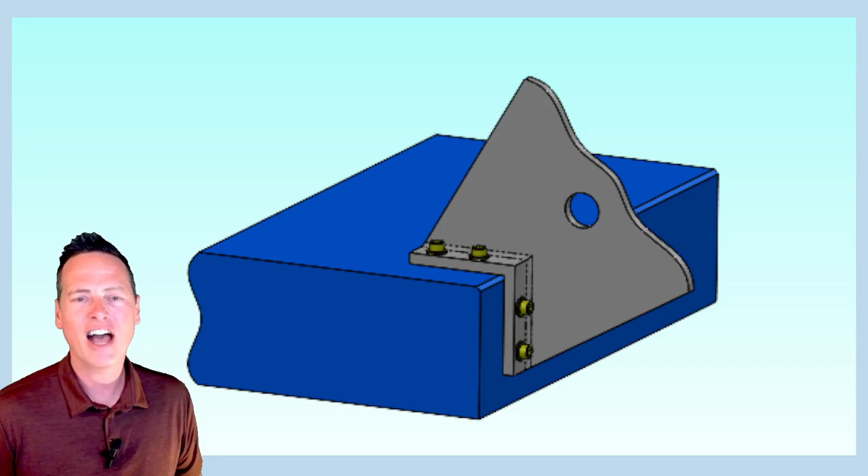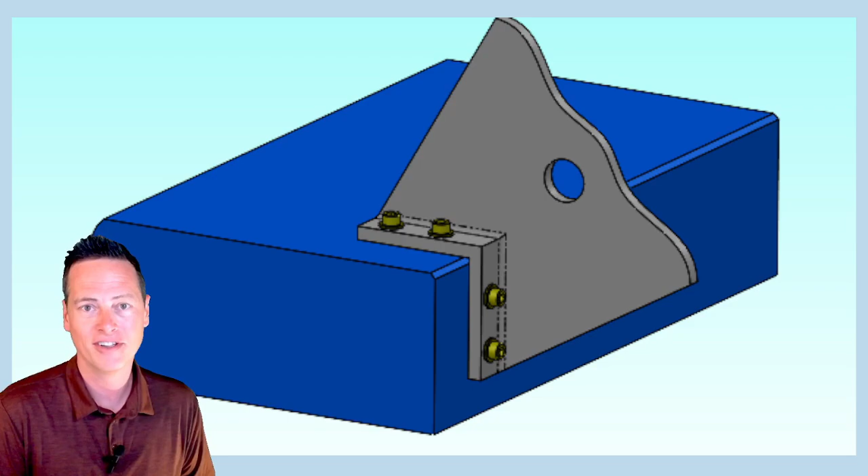The really controversial thing with this has to do with how these two sets of screws, 4 up here and 4 down here, will pull the gray part against the blue part in 2 different directions. I see people doing this when they expect to have forces in both of those directions and don't want to put the screws into shear load. Or maybe they have it in their head that they just want to create a really sturdy bolted joint. But this is likely to be a frustrating assembly for anybody who has to put it together.

Let's assume for a minute that these parts are both made really well. In particular, they're really super square in here. Which screws do I tighten first? The ones on the top or the ones on the side? Maybe I turn them all just until contact and then go back and torque them all later. Maybe I'm working in a pattern like I do with the lug nuts on my car wheels. Okay, it might work, or it might not be that great.

Let's remind ourselves of how these screws work. As we turn them into the threaded holes, they will close the gaps between the gray piece and the blue piece. When they tighten, the screws will stretch a very small amount and will essentially become very stiff springs. That spring force results in preload and will generate friction at the joint between the gray piece and the blue piece. With screws like these, it can be a subtle distinction, not very much turning of the wrench at all, that can make the difference between loose and so much friction that you can't really move these parts at all anymore. Maybe I'm not telling you anything you haven't already experienced yourselves.

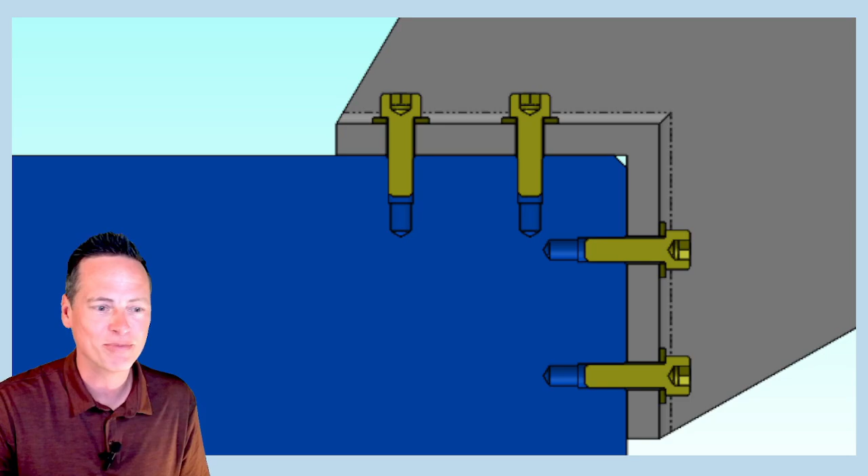What happens if I cross that line with the screws on top, but I leave a little gap on the side? Maybe it's very small. Now I have no real preload on the side. All I'm doing is preloading the friction on the top joint. Maybe one day these parts will take a mechanical shock and the joint will slip. Then my side screws will be loose. There's another possibility that I close the gap down here by stressing the gray part, deforming it.

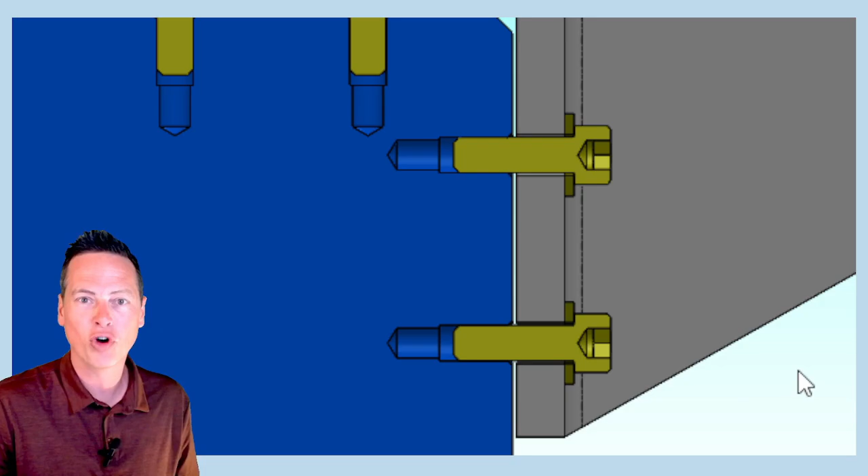Also not ideal. At the beginning of this example, I asked you to assume that these parts were made very square. But what if they're not? In this case, the gray part is a little more obtuse than the blue part. And you can see it has 2 positions it likes to be in.

Always creating a gap on one side or the other. And aside from that gap, whatever's at the other end of this gray piece is going to have a really hard time getting into the right position, isn't it? Unless maybe your idea is that we're going to use these screws to somehow tune this thing into just the exact right position where it's supposed to be. But if you did that, you would end up with very little contact, very little preload, and a weak bolted joint.

There are going to be some viewers out there, our special group of engineers, who will say, come on. They'll say, we'll get those special surfaces machined super square so the gaps won't be that big. We'll write an assembly procedure for the tightening of the screws, and whatever gaps exist, those will close up when we tighten this thing together. Maybe. I'm sure people get away with this every day, or they think they're getting away with it, but it's a bad design, and you shouldn't do it. It will create frustration on the assembly line.

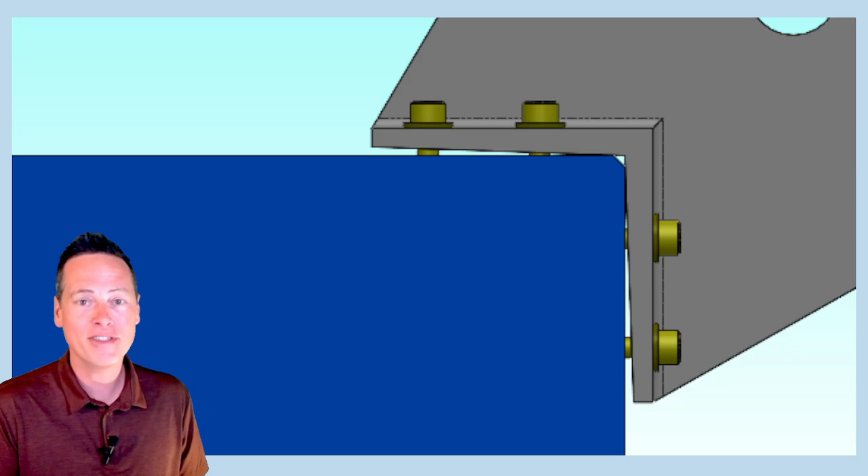I'm not sure these gaps will be that small, and if they are, it's only because we make tight perpendicularity callouts. And this gray part, it looks pretty stiff to me, especially in the direction of this giant rib. I'm not sure it's going to be very compliant at all. But anyway, let's have a look at this drawing. This is GDTG 00543. This is the way I bet 95% of designers would handle this drawing.

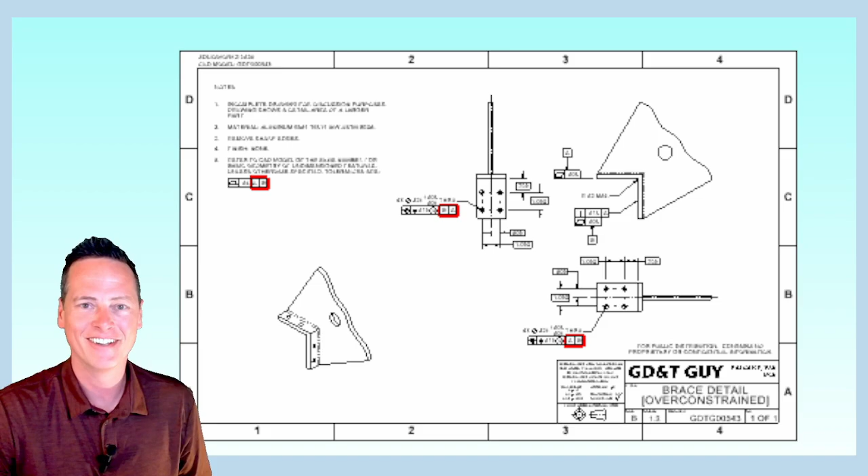Looking at the two surfaces, I kind of randomly chose this one here as being the datum A feature. They're both the same size and perform the exact same function, so it's not much of a choice, and it's a bad sign for us GD&T wise. I relate the side surface to datum A with a perpendicularity, and I call it my datum B feature. And let's make a note that whatever we put for our perpendicularity callout here, that's your gap. The only way to close that gap is to make this perpendicularity tighter, tighter, tighter.

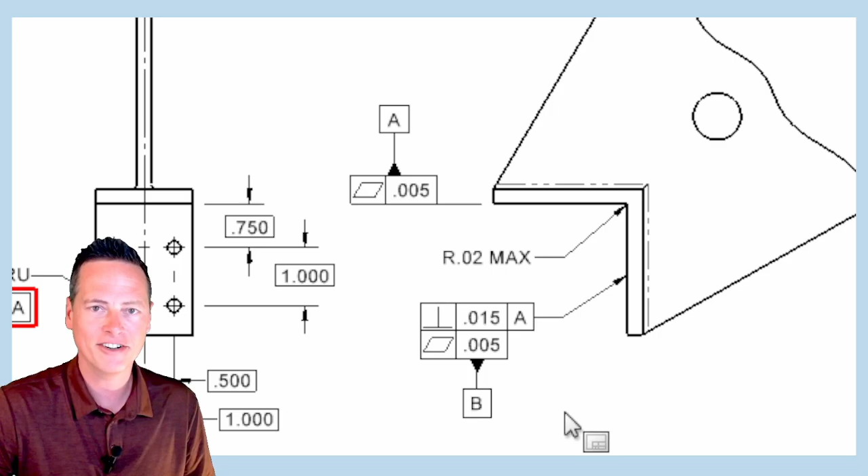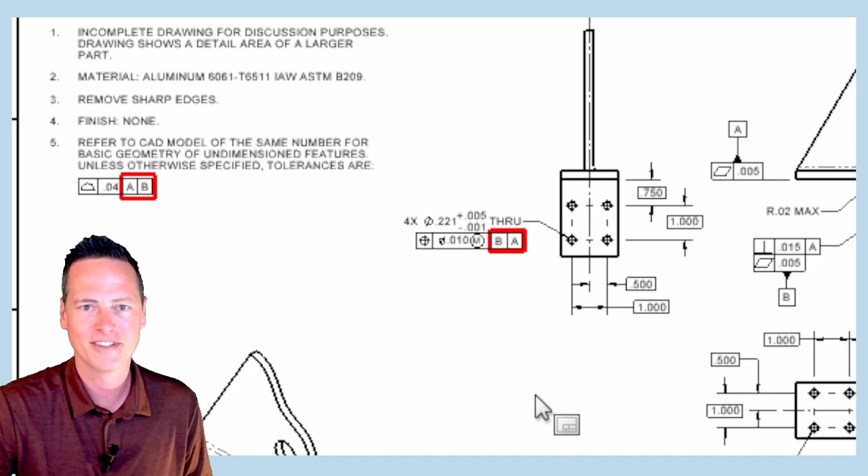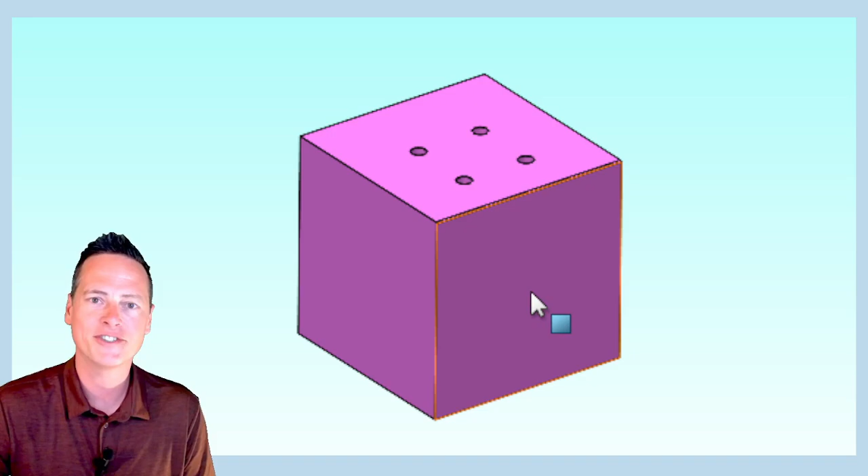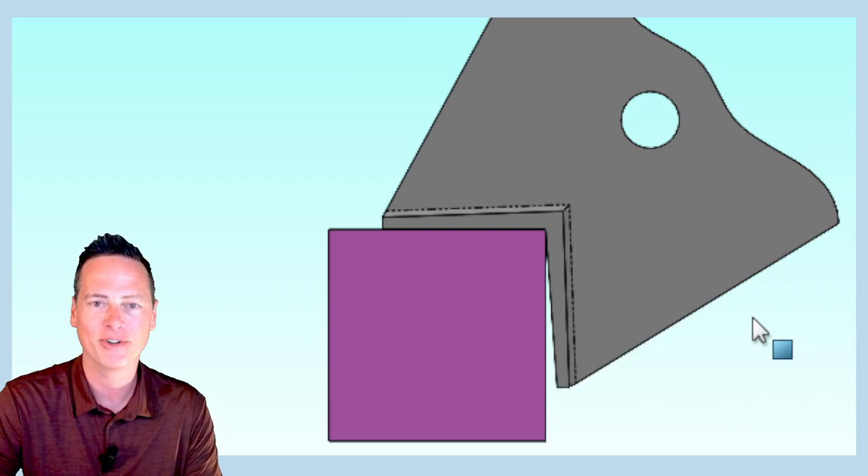On this gauge, this surface would be a primary datum simulator, and this surface would be a secondary datum simulator. And then it has these special holes up here on the primary datum simulator. So we place the part on the gauge to where it has full contact with the primary datum simulator, and then slide it over until there's contact with the secondary datum simulator. And then we check the hole locations with some special hole locator pins.

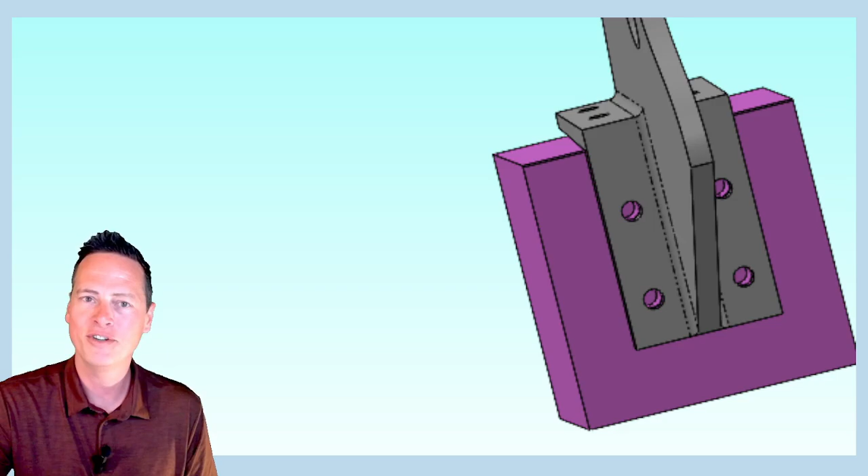Okay, and then we do the same thing on the other side where there's a separate inspection. Put the primary datum in contact, slide until contact on the secondary datum, and then we do the hole locator pins over here. You'll notice that at no time do we check the position of all 8 holes simultaneously. They're considered two completely separate interfaces.

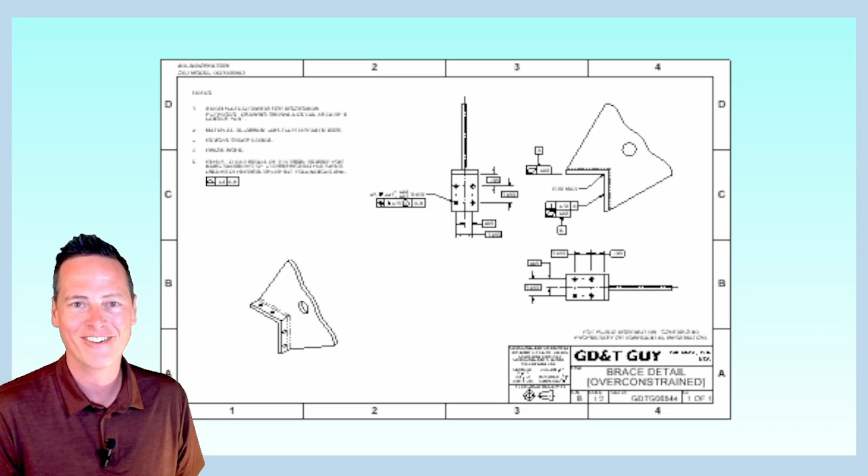But if you don't like that, then this drawing, GDTG 00544, might be a little more correct. This one is similar in how I established datums A and B, but then I use them as equal precedence primary datum AB, and I reference that for all 8 holes simultaneously. In the inspection, you would have a gauge that simulates both datums and can check all 8 holes at once.

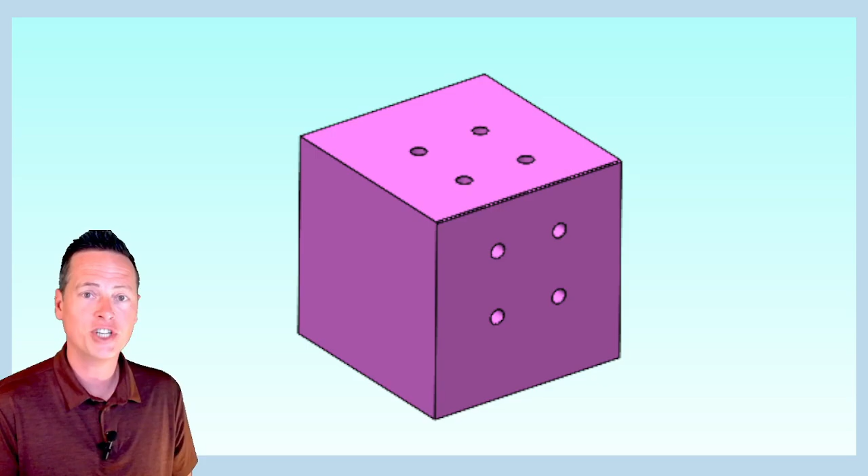And then if you ended up with gaps like this, the standard would instruct the inspector to slip in shims of equal thickness to neutralize the position. At least that's my interpretation. Usually when you have these equal precedence datum features, they are coplanar, coaxial, or at least parallel to each other. This one is like folded around a 90-degree corner.

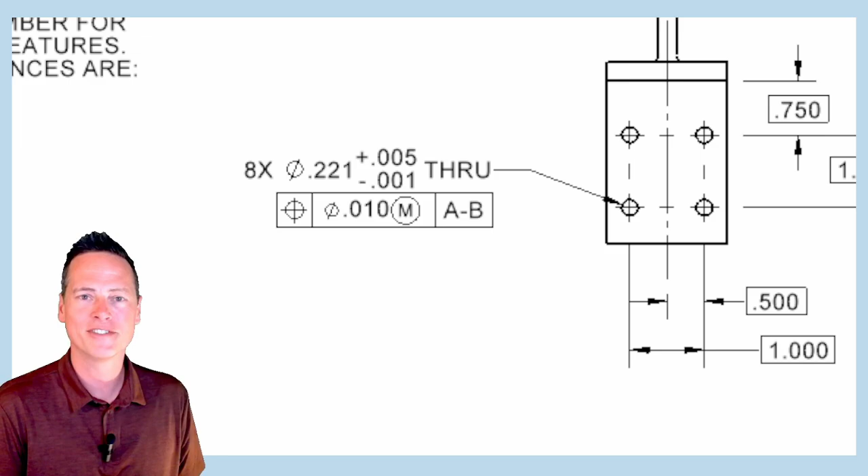We can hope that everyone is going to interpret this the same way, but will they? Anyway, I feel like with this drawing, we resolve one of the lesser problems. The bigger problem remains that our design is over-constrained and probably will not work very well in assembly. And I think that the drawings and the GD&T point to some signs that we're in trouble. And we're going to see some more of that as we move along here.

But what are we observing about over-constraint at this point so far? Well, what I'll probably tell you at least a few times in this video is that over-constraint creates conditions in which there is no acceptable tolerance, in this case, the perpendicularity, and so we end up with multiple unsatisfactory mounting positions. And to overcome these problems, we have to distort the parts, stress them, force them to come together.

And since we're always talking about constraint and degrees of freedom when we talk about datum features, it is in the constraint where we're really going to see the problems. And it's how we're going to fix the problems. Because once you get into the GD&T mindset, you're going to see these things right away and you're going to want to fix them. And then you're just a short step away from being everybody's favorite designer. Believe it.

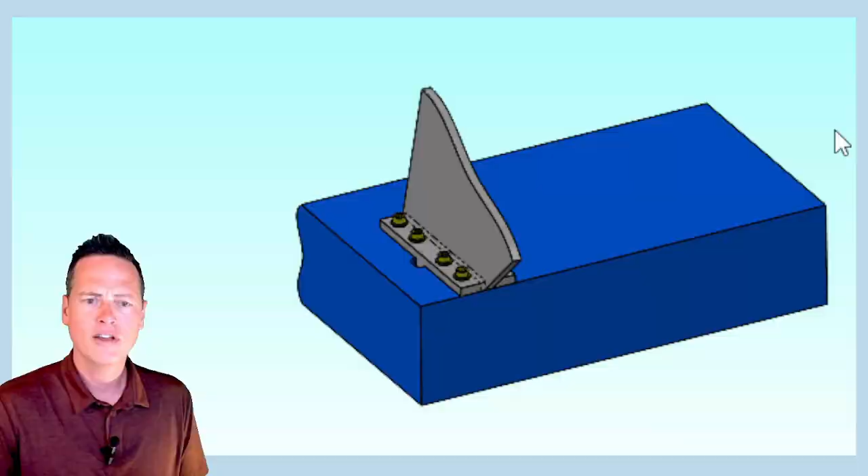So let's look at another version of this brace with a more traditional bolted joint. In this one, all the screws are entering in the same direction. And just as a side note, this might be a double good thing because depending on how big this blue part is, it might be pretty difficult or require some special equipment to drill and tap holes on the end of a really long part.

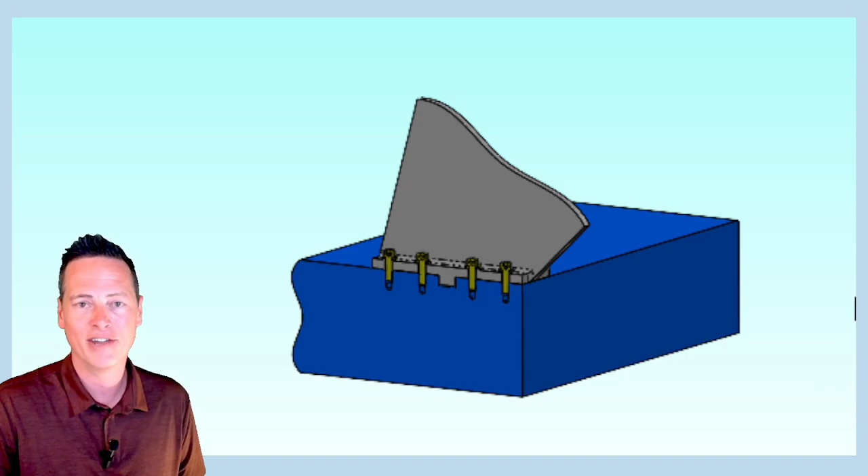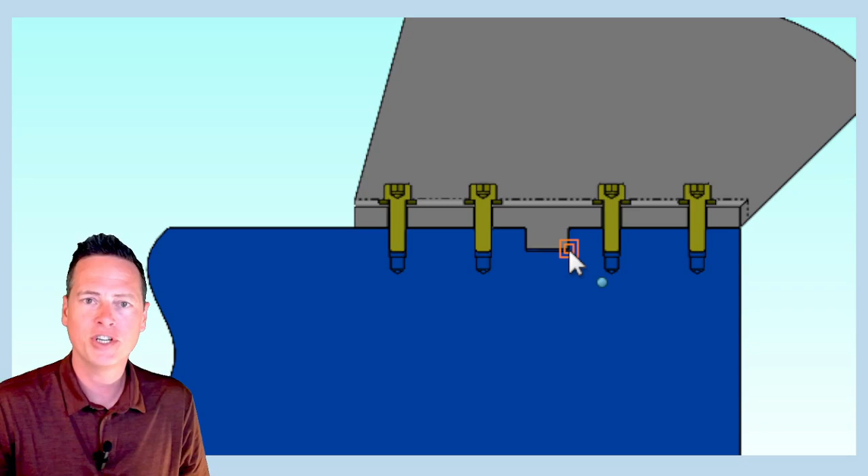Okay, but I digress. In the last design, we were concerned about having screws in shear. In this design, we're dealing with that problem by having a close-fitting locating feature to limit the amount of slip that can occur and to keep the shear load off of the bolts. The drawing, GDTG00542, is pretty straightforward, I think.

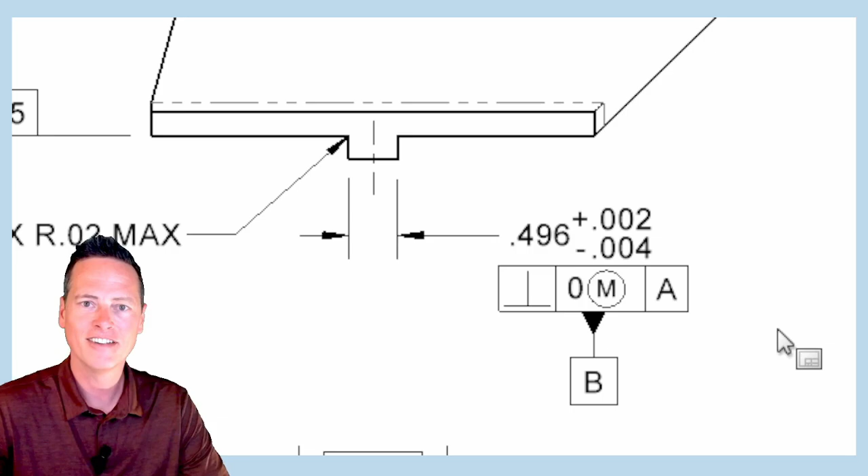We have a 2x coplanar datum A surface feature. And then our locating feature, this undersized half-inch key here, becomes our datum B feature. And then all of our holes and everything are located referencing datum A primary and datum B secondary. Now look, even with this, there's still the possibility or even the likelihood of there being gaps. And that all happens here in this 5/1000ths coplanarity. There could be 5/1000ths gaps.

But I feel like I can ask for 5/1000ths coplanarity here. I wouldn't want to ask for 5/1000ths perpendicularity on the other part. This is a simpler coplanar feature. It can be all made in one machining setup. And I have a couple other reasons for some confidence too. I think this is going to sit fairly evenly, etc. But anyway, I feel a lot better about closing a 5/1000ths of an inch gap than closing a 15/1000ths of an inch gap with screws fighting each other from two different directions.

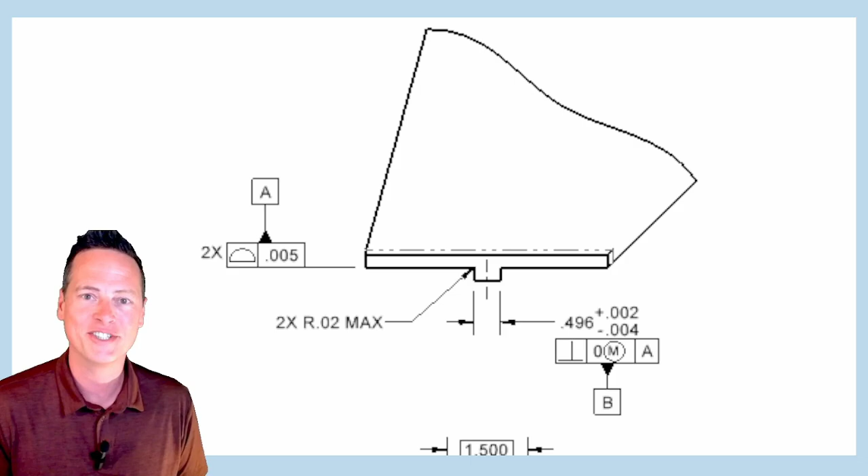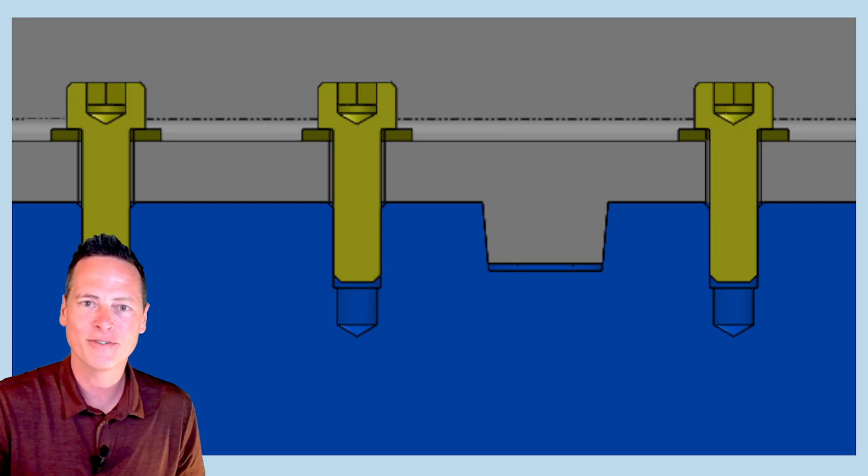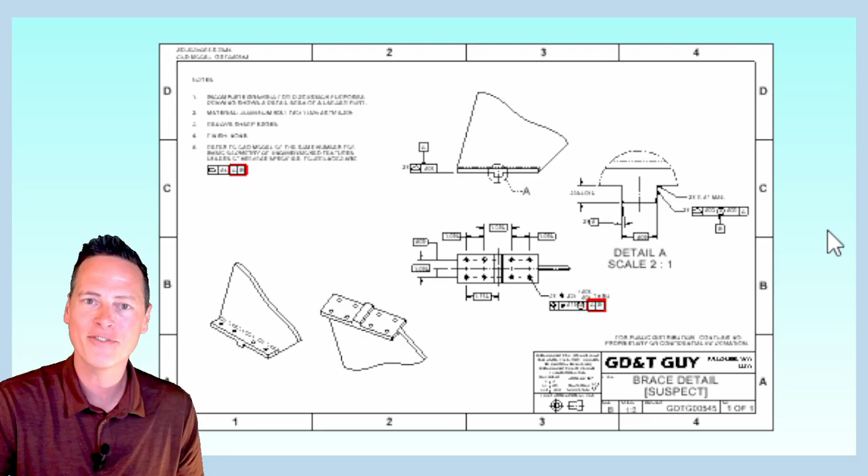Some of our special over-constraint loving viewers will look at the small amount of gap in these locating features and think, I don't like that. They'll say, you know what I want is a little taper in these parts to force like an interference between the gray and the blue. And then if I do that, there'll be no slipping or shifting at all between these parts. Okay then, so to look at a drawing for this, it would be GDTG00545. We've got the same 2x datum A surface feature.

And then in the detail, we can see our taper feature is dimensioned 500/1000ths at the root. The profile tolerance is unequally disposed. That's the circle U, with 2/1000ths being on this side, the outside of nominal, like we're trying for some kind of transitional interference fit. Now to me, this is a tight tolerance. It's analogous to plus or minus 3/1000ths. It's not just the profile or the form, it's like the straightness going in and out of the page across the entire width of the part.

But even being such a tight tolerance, it may be so tight that it can't be made reliably. Will it ever be tight enough to get what we want? We'll get to that in a minute. But first, here in the hole position tolerance, we're using datum A as primary and datum B as secondary at RMB.

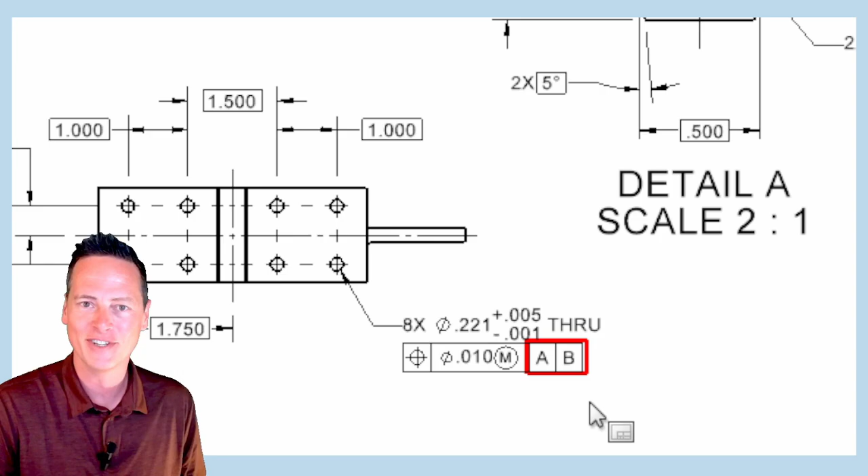Datum B is our taper feature, so by saying RMB, there's some more evidence that we're using this as an interference feature. So now look, datum A is a 3 degree of freedom primary datum, a planar geometric counterpart to these two surfaces, 3 degrees of freedom.

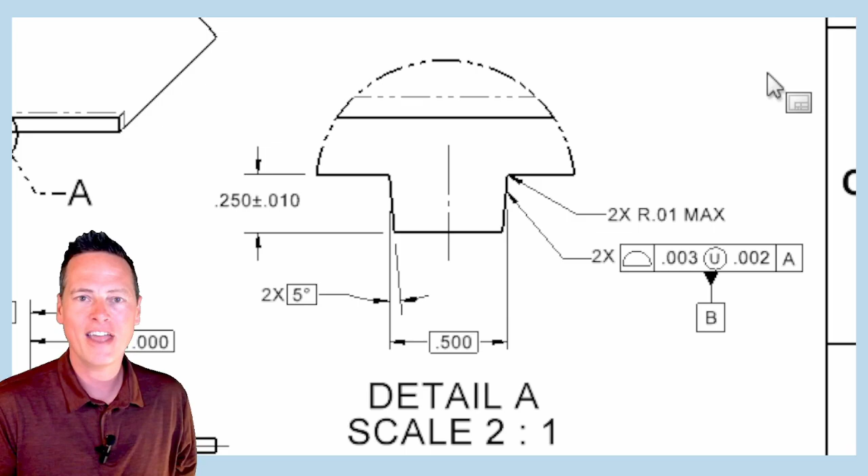Now, if you had this taper feature fitting into its idealized geometric counterpart, taper into taper, that would be a 5 DOF datum feature. If the taper feature is made small enough that there's clearance to the next part, then it could be a 2 DOF secondary datum feature at MMB, sure. But then it wouldn't be a whole lot different from the non-tapered clearance locating feature from GDTG 00542.

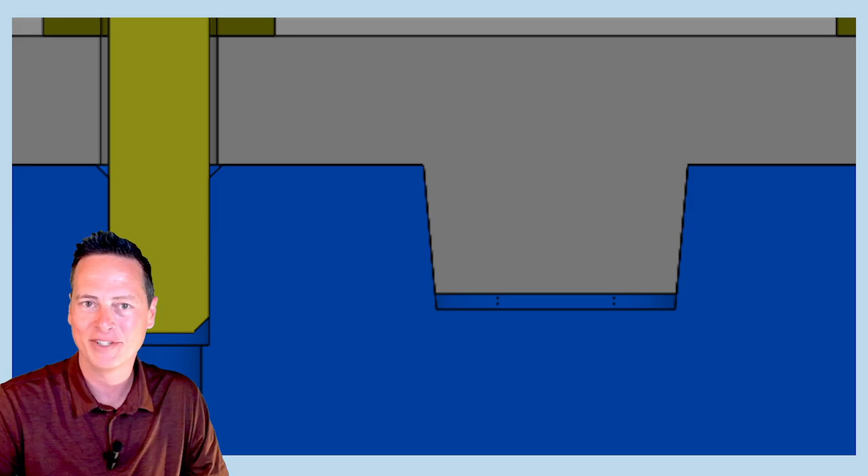Harder to machine, harder to inspect, but to be charitable, probably a little easier to put together at the instant of assembly. But what if the taper feature is made too wide, or if the tapered slot is made too narrow? It seems like this is almost what we're aiming for, with the tolerances pushing us towards interference. If it's like this, we're not even using the datum A surface, right?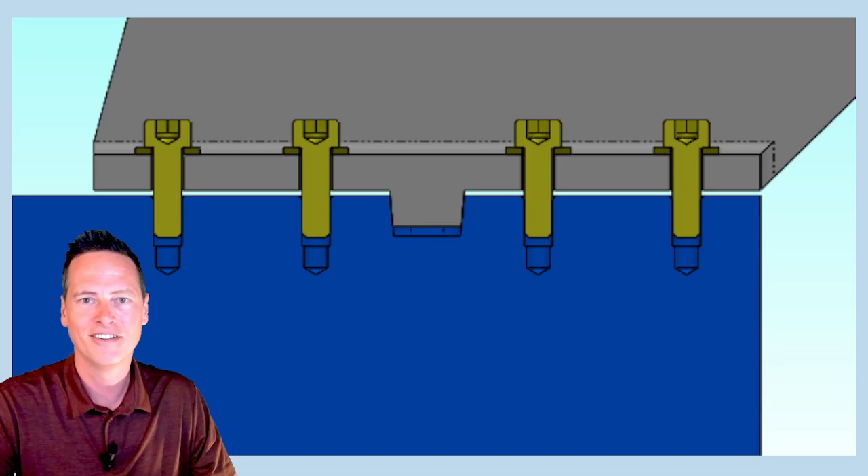But maybe the idea is we're going to tighten these screws a whole lot, we're going to close this gap, and we're going to displace material around the taper. Well, this is a lot of planar contact, and even a couple thousandths of interference could be very difficult to displace. This seems to assume a high level of ductility of the materials. Maybe it could be done with some kind of a press.

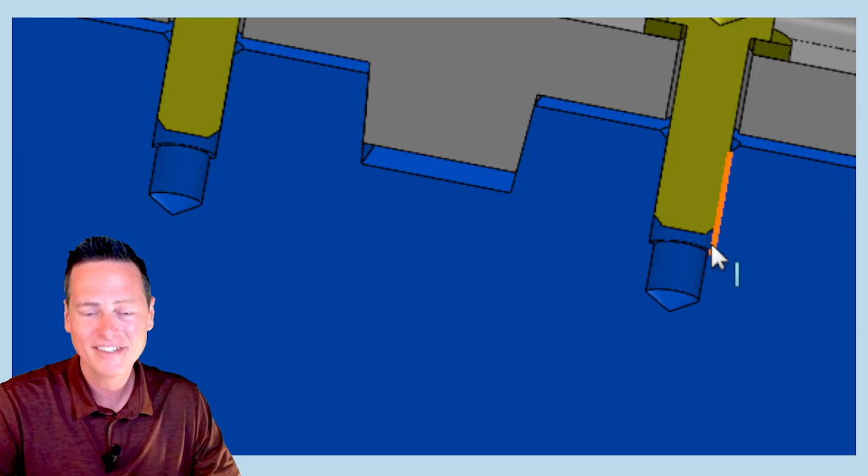I'm sort of skeptical you could get it done with the screws. Probably would mess up the threads. You would have to tighten this up super evenly with the screws. It's not good. But some engineers, the kinds that weren't happy when this was a clearance feature, they just love interfaces like this. They force the parts to their will. And so they'll come back to this again and again.

And I have more examples to show you of how I've seen it. And I used to do a lot of this stuff myself. But surprise, surprise, I think GD&T straightened me out on a lot of it. This whole thing with the datum reference frames, where we're always talking about 6 degrees of freedom, a primary datum that constrains more than a secondary datum that constrains more than a tertiary datum, it's a good system. Because if things work in theory, then we have a fighting chance of them working in practice.

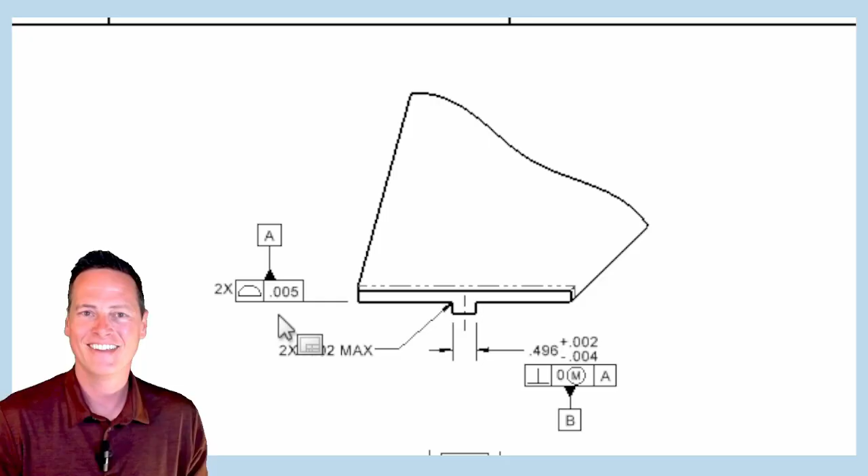If I have a primary datum feature that constrains roll and pitch and translation, and a 2DOF secondary datum feature that constrains translation this way and yaw, then I have a path to setting these other tolerances, making them reasonable, and being pretty sure that these parts are going to go together readily every time.

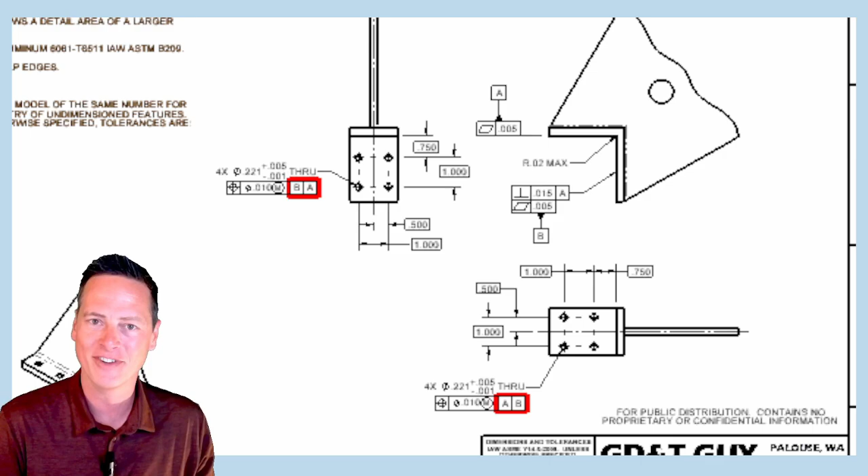But in the case of GDTG00543 here, if I have 2 features, each with equal claim to being the 3DOF primary datum feature of this interface, fighting with each other over who constrains rotation about this axis here, like this edge, well, you're asking for trouble. And so your only course of action is to tighten this perpendicularity, which never actually resolves the problem until it's 0, which you can't get.

All right, and there's a common thread here with the part GDTG00545. If I constrain 3 degrees of freedom with the primary datum, and then, the way I'm using this, constrain 5 degrees of freedom with the secondary, I'm worried right away that we're going to need very tight tolerances on this taper feature in order to get the right amount of interference. And I'm worried it's going to be a lot of stress on the part. And I'm worried that the flat surfaces are not going to come together right.

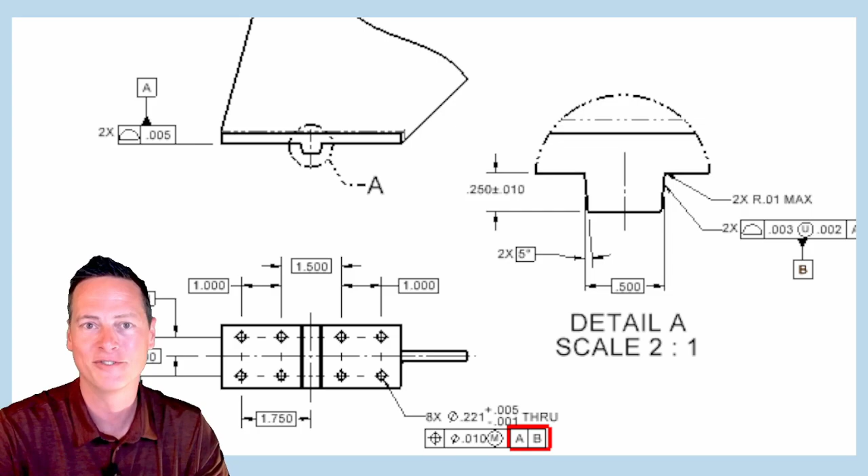On this part, this almost seems like something we're doing to ourselves on purpose. For this one, I'm thinking, maybe it's just an accident or inexperience. But there's also something of an urge that all of us experience more or less strongly, a compulsion towards overconstraint. My goal for you in this video and in the next is for you to recognize overconstraint and to learn how to avoid its worst consequences. We'll get into some more examples and explore the topic more thoroughly in video 2.